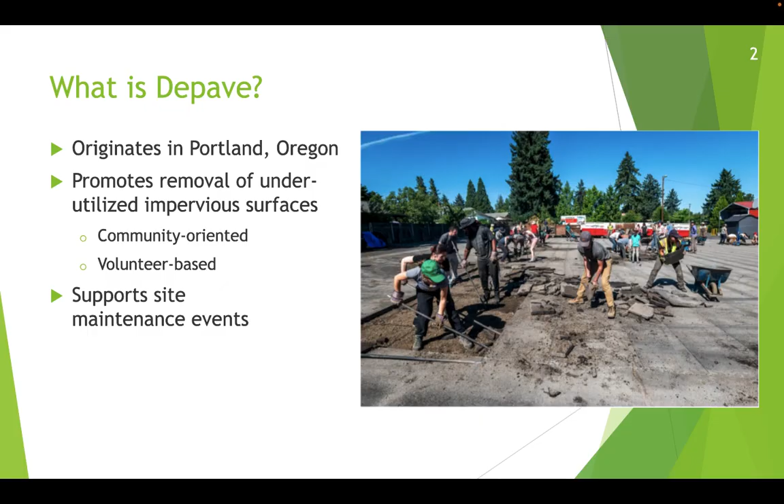This semester, we have been working with the City of Alpharetta and the Metropolitan North Georgia Water Planning District to initiate a program throughout Alpharetta, Georgia that aims to depave and rewild impervious surfaces. Depave is a program that originated in Portland, Oregon, promoting the removal of underutilized impervious surfaces, with a focus on bringing together the local community through volunteering and public engagement events.

The main benefit of depave is that it reduces stormwater. It also sequesters carbon and lowers ambient temperatures. Local benefits of depave include promoting community involvement through learning opportunities and increased outdoor amenities.

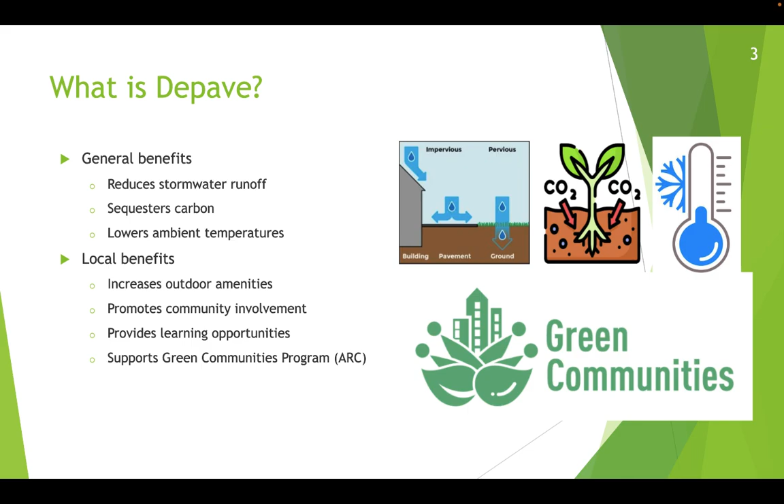Our project's purpose is to demonstrate the feasibility of depaving areas, showing the usefulness of creating green spaces from underutilized impervious areas and incorporating stormwater control measures and functional amenities. The ultimate goal of this pilot is to begin the depave initiative in Alpharetta and bring it to a local level by educating and empowering property owners to depave their own land.

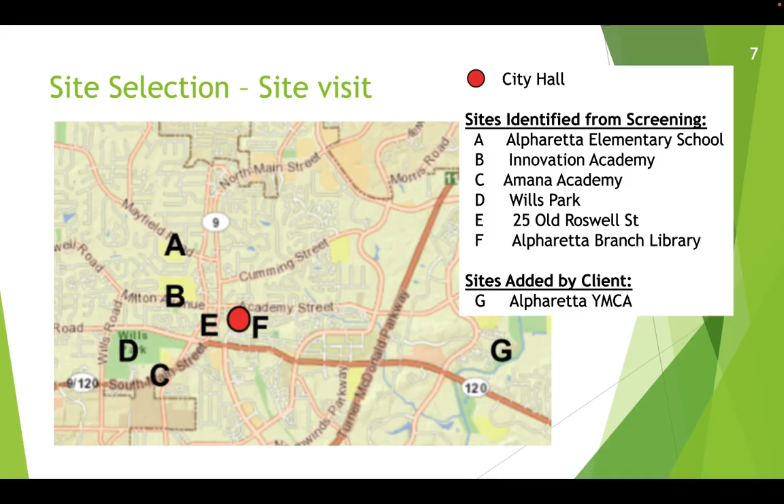To begin our pilot study of depave, we selected a variety of sites in Alpharetta, Georgia. Through GIS exploration, we identified potential sites based on ownership, size of site, percent of impervious area, and any drainage or stormwater issues that would indicate they're a good candidate for depave. Here you can see a list of 7 sites that we visited based on our initial GIS exploration.

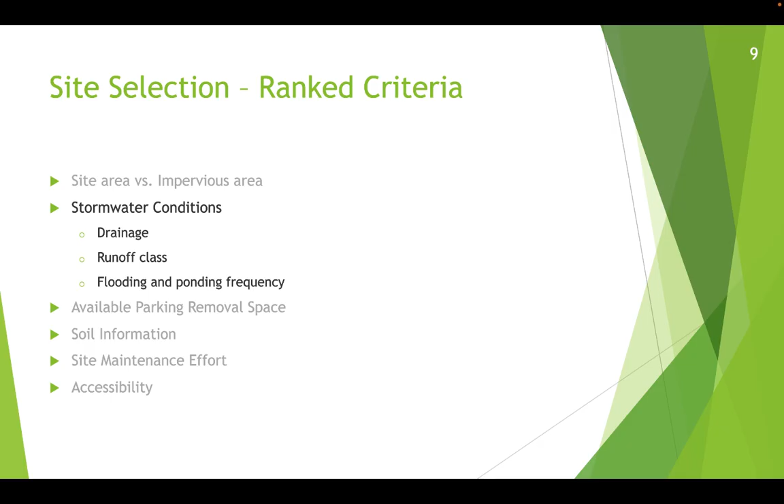After our site visit, we created a more stringent ranking criteria in order to pick the best site for our project. We weighted site area versus impervious area, stormwater conditions, available parking removal space, soil information, site maintenance effort, and accessibility. After the rankings, we picked Amana Academy as our site, which is a public charter school about a mile southwest of Alpharetta's city center.

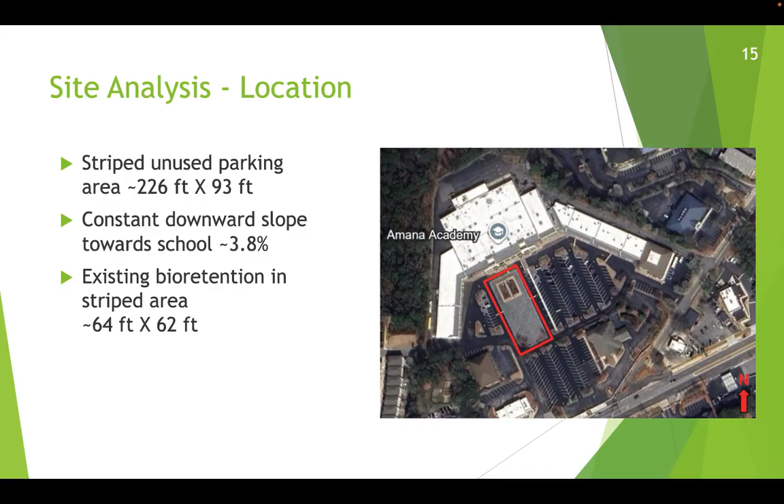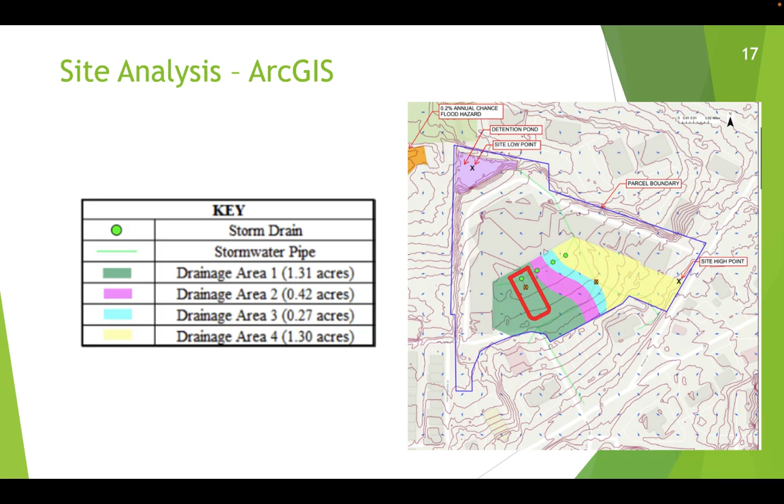After choosing Amana Academy as our site, we began a hydrological analysis of the site conditions, including pre-existing storm drains, detention ponds, and drainage basins that we determined through flow patterns on the site. With this information, we had to calculate the runoff volume of both pre-construction and post-construction conditions in order to reaffirm that depaving the area would indeed decrease stormwater runoff.

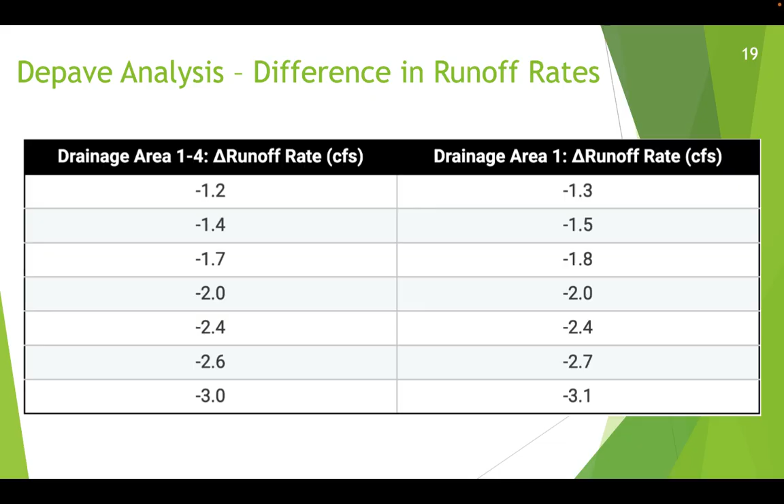Our calculations confirmed that depaving this site area would reduce the runoff rate, measured in cubic feet per second, for all frequency storm events. While we proved that simply depaving the area would aid greatly in runoff volume reductions, the depave program is about creating a community space through the use of functional amenities and incorporating stormwater control measures, or SCMs, which are used to control rainwater runoff on a site.

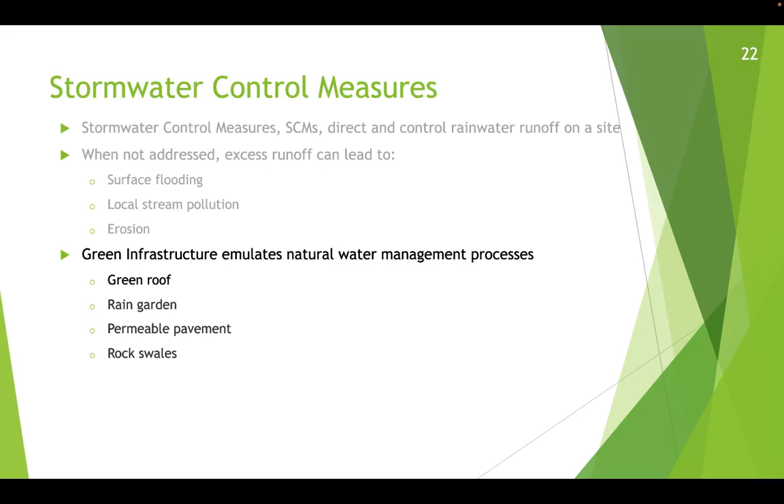SCMs address flooding issues, local stream pollution, and erosion. SCMs have the option to be considered green infrastructure, which emulates natural water management processes. After the pavement demolition, we decided to incorporate 4 green SCMs: a green roof, a rain garden, permeable pavers, and rock swales. A rain garden is a depression in the earth with specific plants intended to temporarily hold rainwater and allow it to soak into the ground.

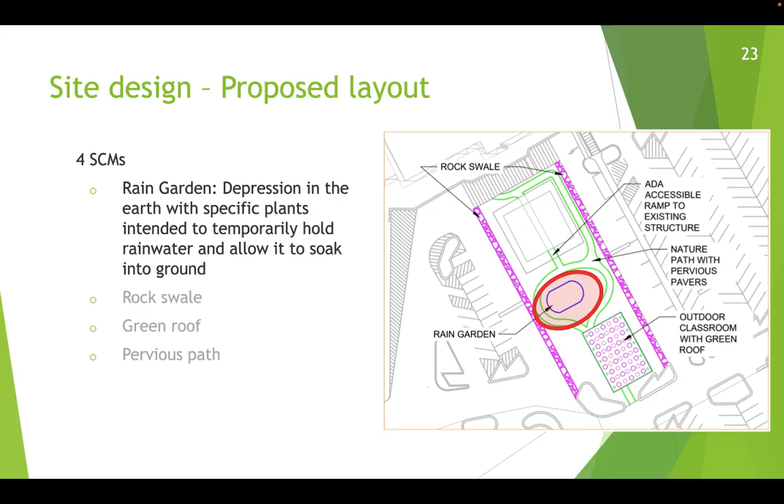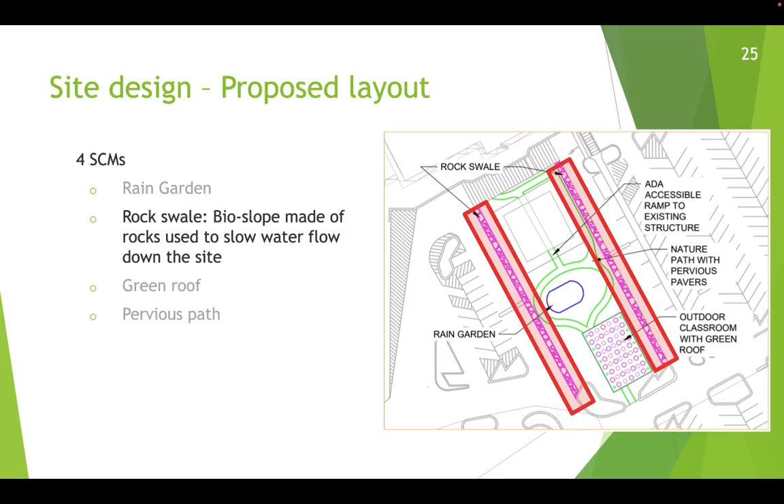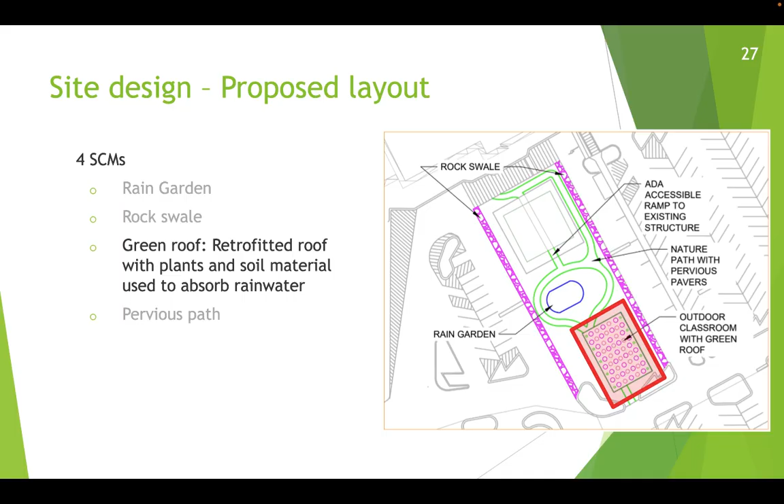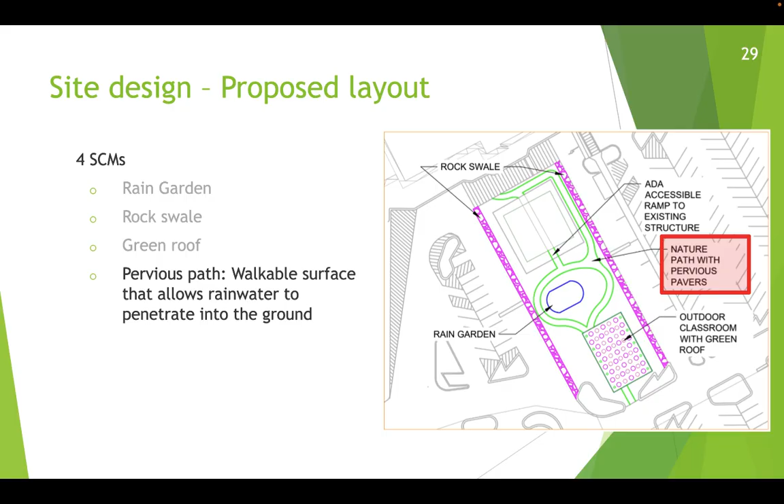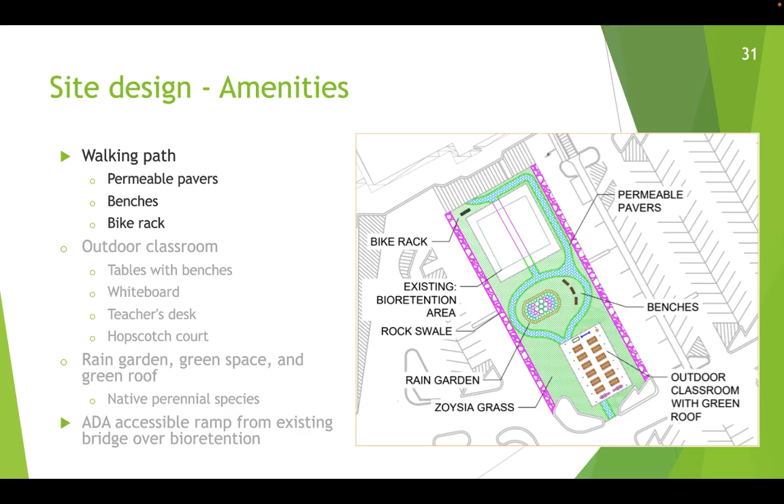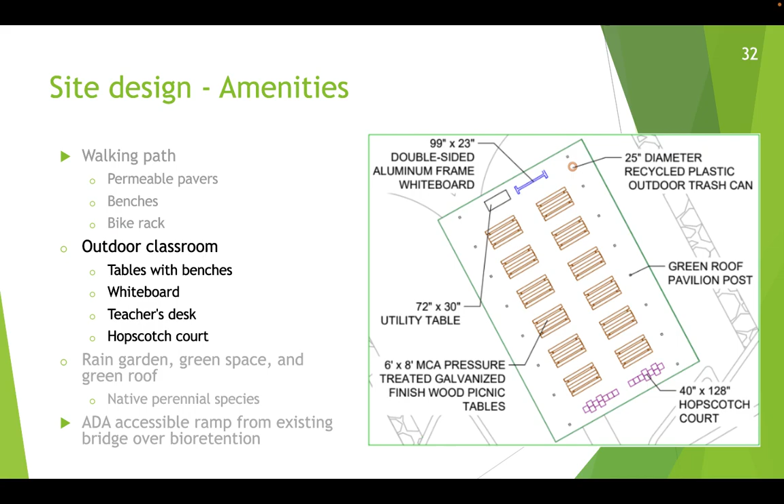For the site amenities, which would help increase community engagement, we have a walking path that incorporates benches and a bike rack along the pavers. The outdoor classroom will be positioned under the green roof and will include 12 tables with benches, a whiteboard, a teacher's desk, and 2 hopscotch courts. The green roof and rain garden plants will host native and perennial species, and an ADA accessible ramp will be added to the bridge over the existing bioretention pond in order to promote equality and safety.

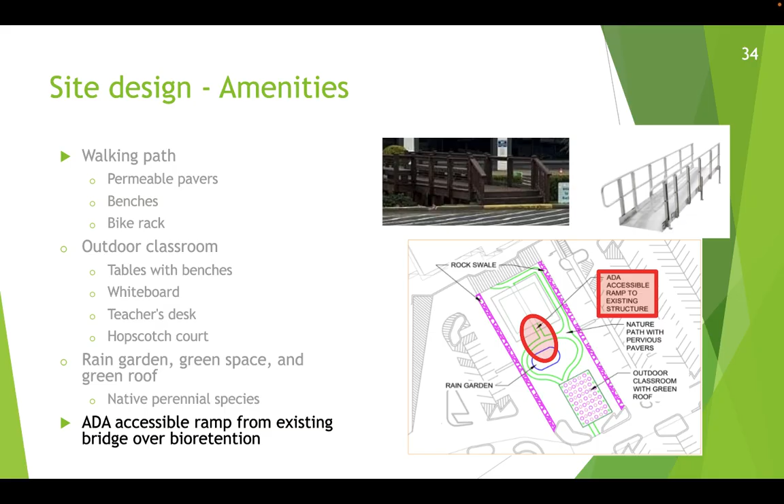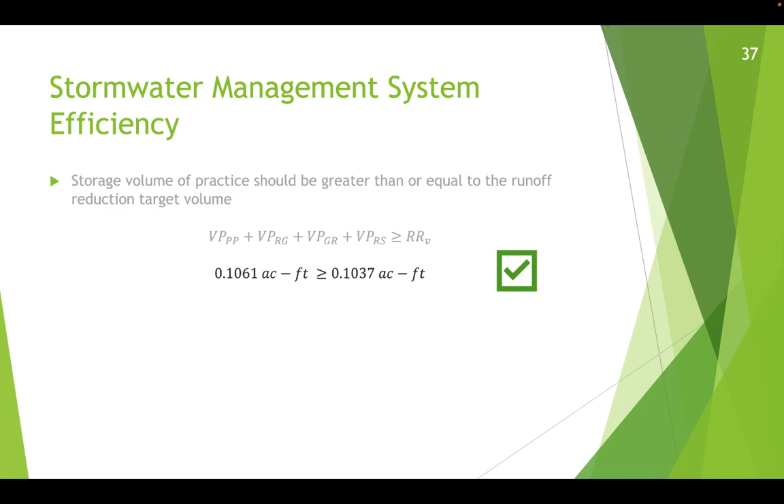As per the Georgia Stormwater Management Manual and the Alpharetta Stormwater Policy Handbook, code requires a runoff reduction target volume for 1 inch of rainfall. So we calculated our storage volume for all 4 SCMs and affirmed that it was greater than the calculated target volume of 0.1037 acre-feet, deeming our stormwater management system as acceptable.

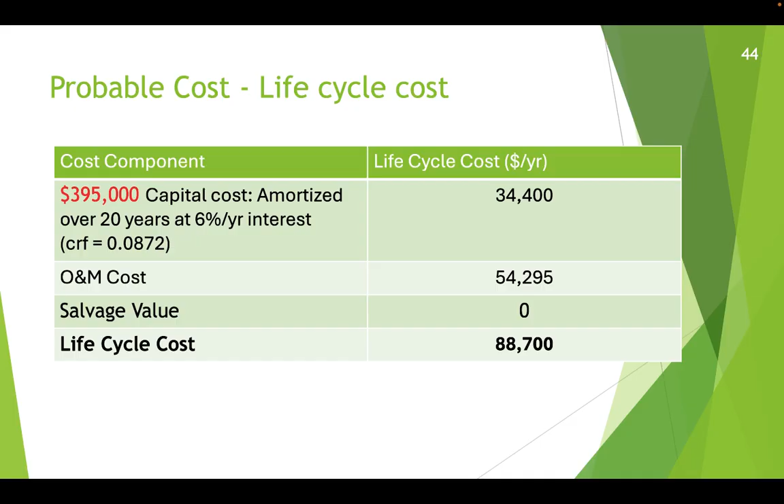We prepared a cost analysis of the entire process and deduced a capital cost of $395,000, including demolition and grading, materials, installation, and maintenance. This cost may seem infeasible for many entities to perform on their personal land, but much of this cost is due to labor. Since part of the depave initiative is to work on volunteer-based projects, over a third of the cost can be saved by employing volunteer work.

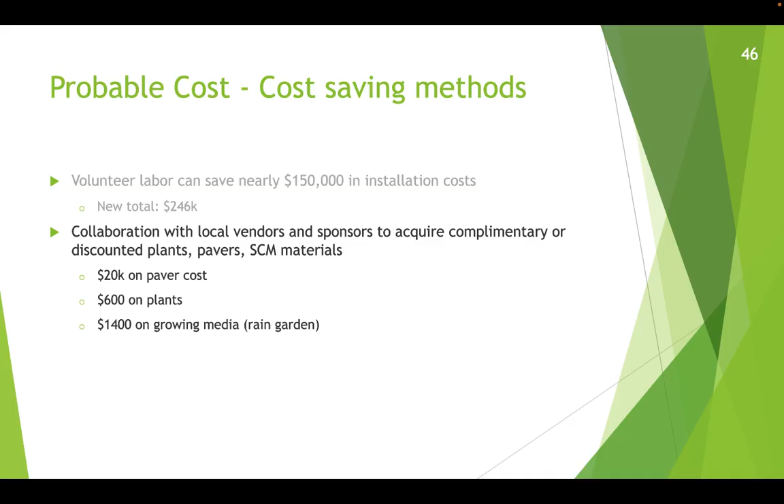In addition to this, the community aspect of this project lends itself to potential discounts or even complimentary materials from local businesses.